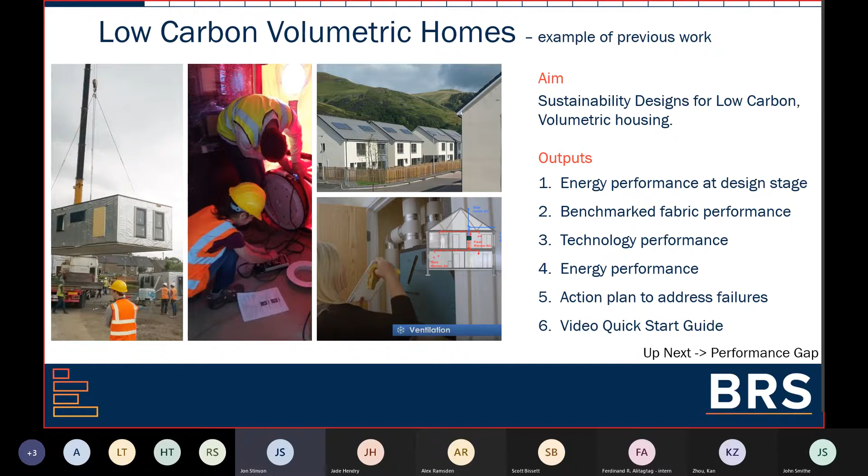So I doubt that anyone has faced, and I hope that no one has faced, the performance gap meltdown crisis that we did back then. And that's what really influenced this particular presentation, which brings me nicely to the performance gap, why we should fear it, and the sustainability parameters that we're referring to here.

So, it's just getting my clock over here so I can see the time.

This is the first time that I've presented on the performance gap, and I'm sure you've heard a bunch of other people harp on about it. And I won't be the last person to cover this, because we're not quite done yet in terms of knowledge exchange and educating various different parts of the sector.

And just because it's been talked about a lot doesn't necessarily mean that early career professionals know anything about it. And that's what we're here to do with Collab today.

So the performance gap terminology, it didn't start in the construction sector, and it's not unique to us in any way. It was coined in the 19th century to describe why the second generation of steam locomotive wasn't performing better than the Gen 1 train. They needed a good reason as to why all that investment in technology wasn't providing a betterment. So we got the performance gap.

Now, for us in the construction sector, it really boils down to three things. One, behavior. Two, the quality of our models and the simulation formulas. And three, the quality of our measured data in terms of what we get from our as-built sensors and loggers.

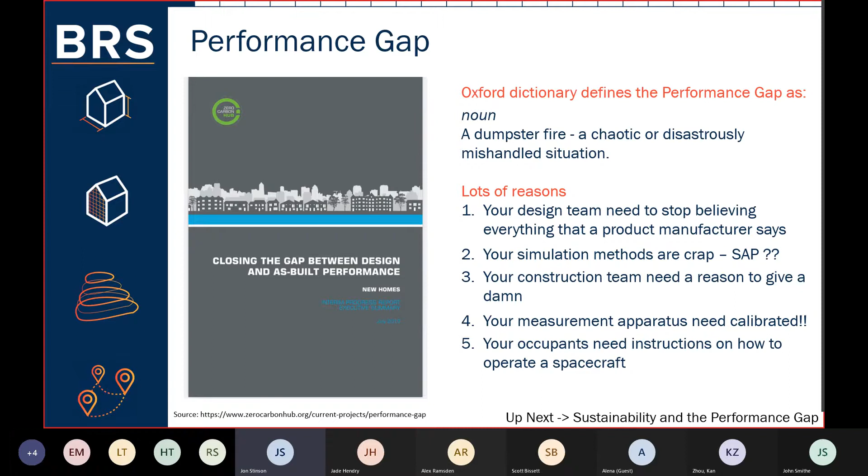So what makes this webinar different from the last one you've attended about the performance gap? Well, this is not about the why - why the performance gap is a problem and why sustainability is important, because we're well past that point. It's not about the how - how the performance gap is wrecking our sustainability progress, because we're also well past that point.

I've structured this presentation today to be about the what, as in, what does this look like on the ground? When you're in the trenches on the front line, when you're facing down the barrel of a very angry client, and you're wondering, what the hell am I going to do? That's what this particular presentation is about.

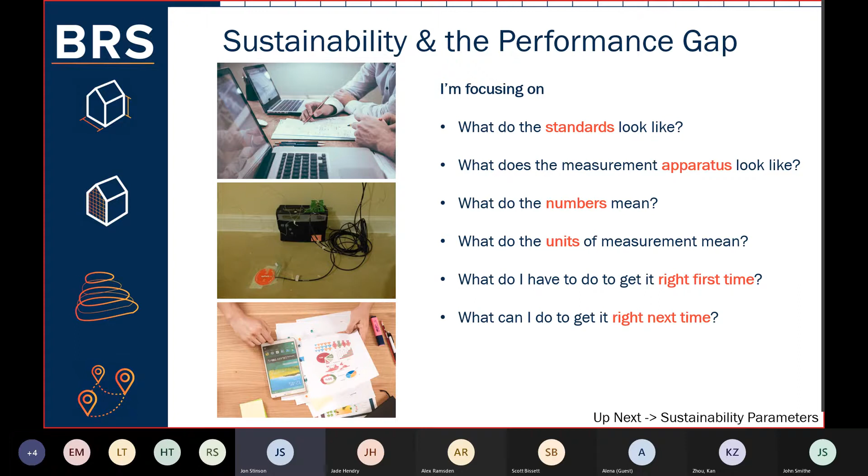So I want to focus on what the standards look like for as-built, or as-designed and as-built. What does the measurement apparatus look like when you're doing it at the as-built stage? What do all these numbers mean for as-built and as-designed? What do the units of measurement mean? And what do I have to do to get it right first time, and what do I have to do to get it right next time?

So let's get stuck into what the standards look like. First off is sustainability, quite a broad term, a very big word with hundreds of meanings and literally hundreds of interpretations. The word is frustratingly difficult to actually nail down into something quantifiable.

Conscientious citizens have been trying to define sustainability since the 60s, essentially to undo all the damage done by the rampaging Victorians during that era. Government stepped up in the late 90s. Companies and corporations joined the movement in the mid 2000s, or early stage of the 2000s rather, and now it applies to almost every aspect of everything that everyone does, now and forever.

So let's define our meaning of sustainability parameters for this webinar. It's not about the three pillars, which is economy, environmental, and society. My colleague Ruth could speak about this for hours, and she has an article on the LinkedIn page speaking a little bit about this. So it's not about that definition, those three pillars, because that's much too high level for the purpose of this webinar.

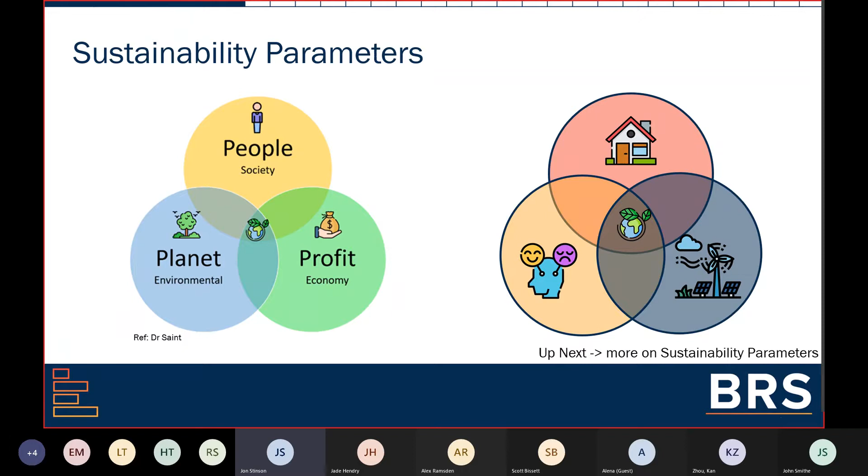I'm talking about this one here on the right hand side, which we call the three actionable parameters. These actionable parameters can be applied to water use, well-being, which encapsulates the term for acoustics or noise, and safety. It can apply to energy consumption, it can apply to carbon emissions, and it can apply to cost to run a building. So from this point forward, I'm referring solely to

energy in buildings. And to keep it simple, I'm going to speak about space heating energy only, because the full version of this is about 150 slides, and we don't have time for that today. But if we can come back sometime in the future, we might be able to do these other bits and pieces with Collab.

Now, the technology and the building parameters, those two circles there on the right-hand side, were the original actionable parameters defined between 2005 and 2007.

My research between 2007 and 2009, amongst others, introduced this third parameter, which is the occupants. Until that point, we were all happy in the notion that sustainability in the built environment meant optimizing the relationship between how much energy a building demands and how much the on-site renewable energy technology could supply, or in other words, reducing one and maximizing the other.

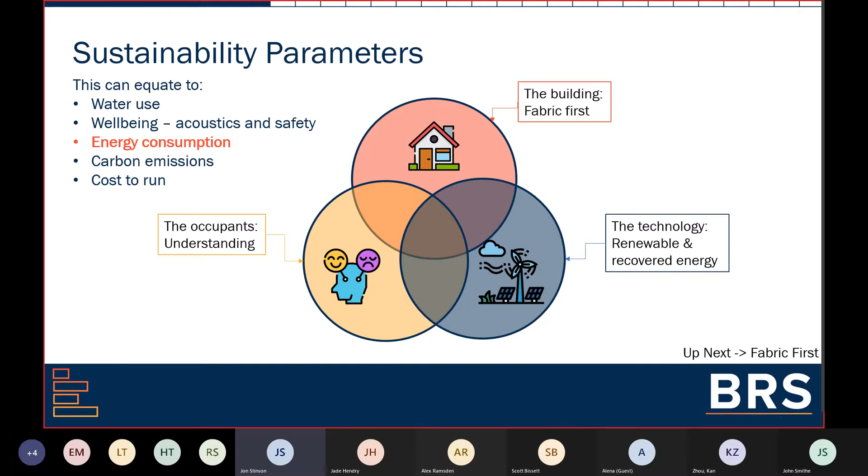Then we started to see our new shiny, low carbon, low energy buildings behaving very badly with huge energy bills. This was not so easy to resolve because now humans are involved, and nobody went to architecture, surveying, engineering, or construction school to learn about why humans do what humans do. So psychologists got involved, and that got very messy for those of us not from a psychology background. But we're not going to worry about that today.

We're going to focus on the materials side. So if we look a little bit deeper into these three actionable parameters, we have materials, which for the purpose of this webinar is focusing on thermal transmittance, thermal bridging, and condensation. It also includes the embodied energy, which we're not going to cover today.

Technologies focus on space heating generation, which is really about the fuel type and the coefficient of performance, ventilation strategies, and also heat recovery systems. And human expectations when it comes to space heating is energy bills, natural light, air quality, noise, safety, and what you can do to the building after it's been constructed.

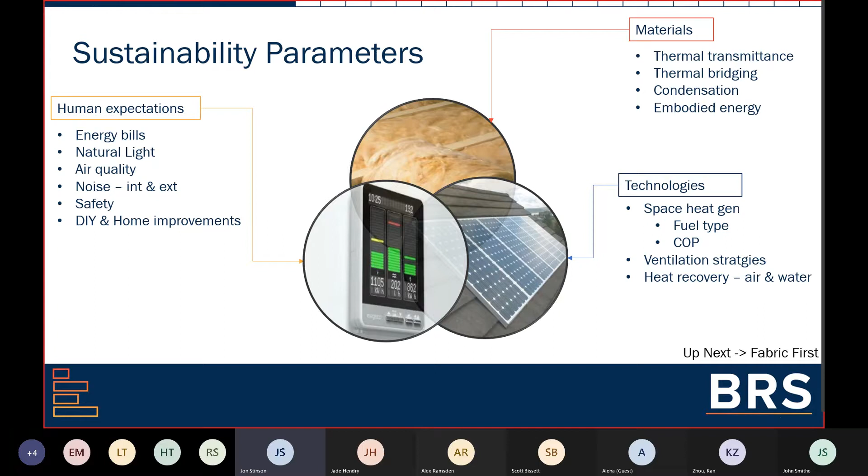Now, if we look at that Venn diagram just a little bit closer, we realize that the new parameter of human expectation not only brings a lot of challenges by itself, but it also introduces two more gray areas. Between human expectations and materials is perceived comfort, which has a very broad spectrum. Between human expectations and technology is usability and controls, specifically those of the user interfaces we have to interact with to achieve our perceived level of thermal comfort.

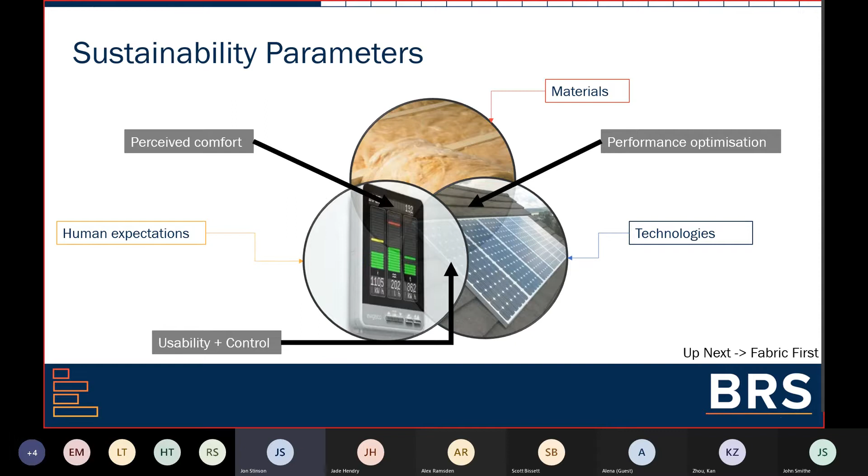We have the age-old performance optimization between technologies and materials, which is relatively easy to achieve. Now, as we got our heads around the right behavior modification and change stimulus, we realized, hold on a minute - why is a low energy house made with steel and phenolic foam declared as being just as sustainable as a house made from timber and sheep's wool? Why is that being allowed? Then the economists came in with their carbon accounting, embodied energy, and life cycle assessments, which expanded the scope of sustainability and the parameters past the operational phase of a building's life. That's a whole new field of science, one which my business partner Ruth knows all about, but one which I'm going to avoid talking about today. For this webinar, I only want to cover one of these parameters in isolation, and that is fabric first, the materials.

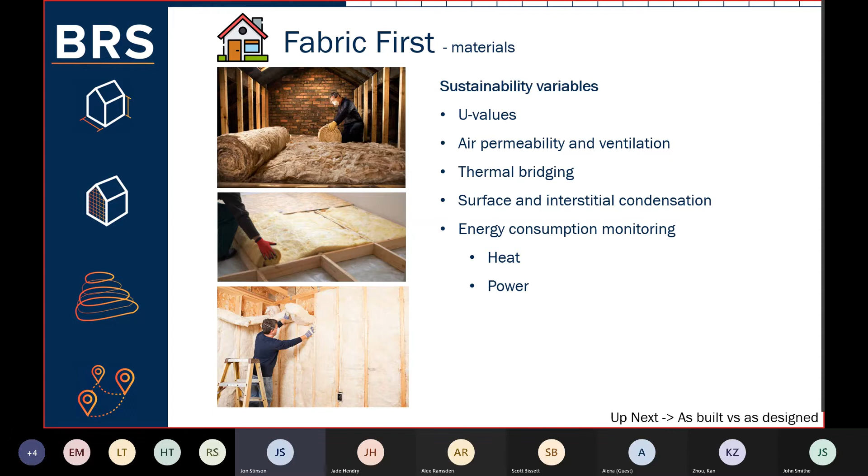By fabric first, I mean specifically the performance indicators for U values, air permeability, thermal bridging, condensation, and energy consumption. I want to look at these five variables through the lens of standards, targets, values, units of measurement, and then the apparatus and equipment we can use to actually measure them when the building is complete. Which brings us neatly into the design standards.

We're all familiar with this little adage, and it's flexible enough to be applied here. I want to keep this in mind as we go through these next slides, because this is what typically happens. Someone will say, oh yes, air tightness, I know all about air tightness. I've read something about that in a trade magazine on a CPD pull-out one afternoon.

Well, first off, it's pronounced air permeability, not air tightness. Secondly, variables like air permeability are set way at the very start of a design stage, and then can very quickly get lost in the myriad of other important design and building requirements. No one really pays much attention to it until your building performance contractor comes back with a report saying your air permeability value is much worse than you said it was going to be. What are you going to do about it? Then there's lots of running around and getting a bit panicked.

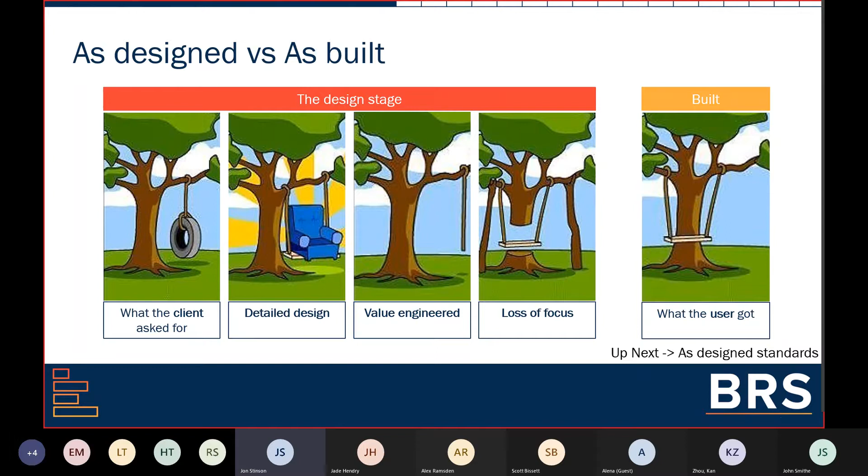A lot of what I'm talking about in terms of U values and air permeability has become so ubiquitous to us in the built environment that it's overlooked an awful lot and just perceived as, well, it'll be all right on the night, we'll get it sorted out when the time comes. People can lose focus on those things very quickly.

So when I say sustainability within the context of this webinar, I'm referring solely to fabric efficiency of the dwelling, and I'm going to go through each of these five one at a time. Some of you will be familiar with where those variables live in the devolved building standards or building regulations or building control documents, whatever you want to call them, from whatever region you're from. But for the sake of completeness, let's give each of these variables their proper origin and their legal position.

Each of them exists in at least one BSEN ISO. I want to point out that all of these are part of legal requirements for building standards or building control, whatever you refer to them as, and have been and need to be verified by the building standards or building control officer before the thing is actually built. So what you read inside Part L or Section 6 or Part F or wherever else, they've all begun life in one of these BSEN ISOs.

Most of them have been renewed in the past 3 or 4 years, and they will continue to be renewed and will continue to inform BRE, or BRE will continue to inform them. That will continue to inform SAP. So as we move from SAP 2012 to SAP 10, there'll be a jump from the BSEN ISO 13790 to the BSEN ISO 52016, which has a brand new set of formulas and equations there to define thermal bridging. So that's where they kind of come from.

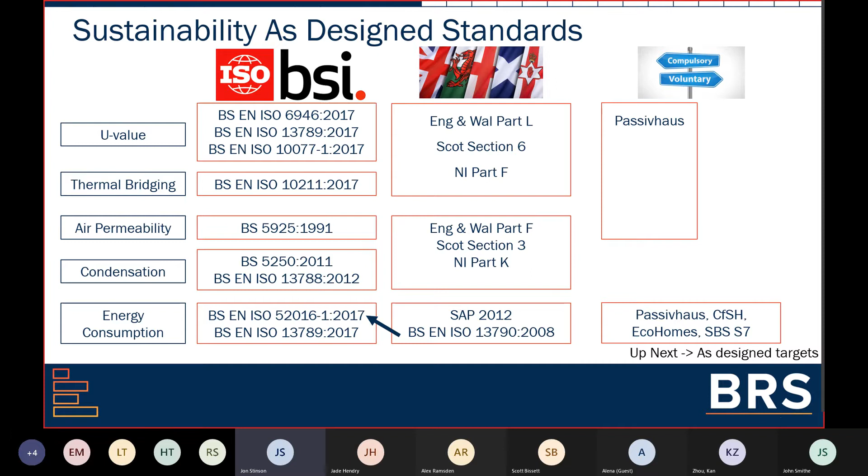Now we've got some non-compulsory, voluntary standards here, which are Passive House, Code for Sustainable Homes, Eco Homes, and Scottish Building Standards Section 7, appropriately named Sustainability. I'm going to make reference to Passive House and SBS 7 once or twice moving forward, and I want to make clear that those are voluntary standards. I'm not going to go into the Code or Eco Homes because they're kind of either dead or have died off in recent memory.

First off, U value or thermal transmittance also includes a factor for repeated thermal bridging, which is one of the two types of thermal bridging I'll be speaking about today. U value is a measure of how much heat energy in watts passes through every meter squared of element when the temperature on either side of that element differs by 1 degree Kelvin, giving us watts per meter squared Kelvin. This value has the largest effect on the thermal comfort within the dwelling, or any building really.

If you have, which happened recently and got a little bit of unfortunate press coverage in the construction news, a house builder that misses out a big chunk of wall insulation for whatever reason, it doesn't take too long before the occupant works out that this room is very cold. Why am I paying this amount of money for a new build? It's one of the issues that are very easy for an occupant to detect in terms of it not being there or not working well enough.

We use the BRE U value calculator and the BuildDesk U software to do our at-design-stage calculations.

For existing buildings, the U value can be as high as 5.2 for windows, 2.4 for a roof, and 1.8 for a wall. These are historic values, for pre-1919 buildings roughly. For new build, the targets in the various building standards and regulations around the country go between 0.21 to 0.3 for walls, and very similar for roof and floors, and 1.6 for openings. The Passive House standard is somewhere below 0.8 for openings.

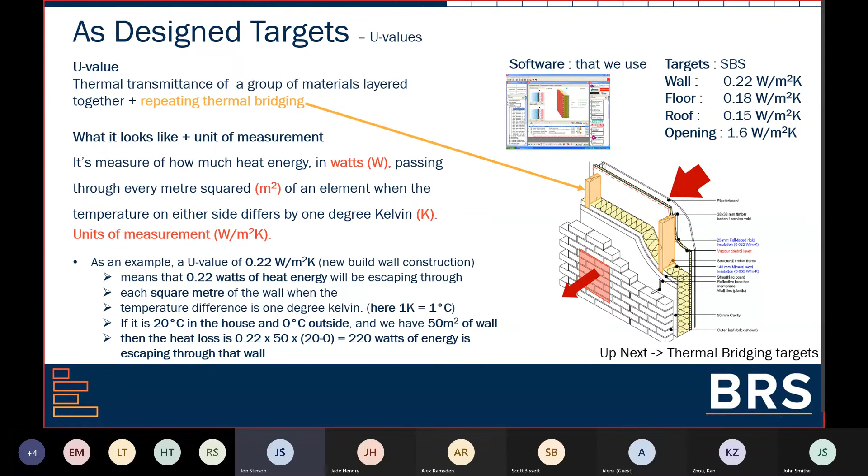Thermal bridging, or the psi value — this has the largest effect on the health of the building, and therefore the health of the occupant, which we'll cover a little bit later under condensation. We use Flixo or the LBNL Therm software — Therm being free, and Flixo having one of the better, more usable interfaces, but there's a cost to that as well.

Those days are gone, and we can now choose BRE's default psi values for junctions, which are, for example, a junction between a wall and a floor is 0.32 watts per meter Kelvin, or for a windowsill, 0.08 watts per meter Kelvin.

Or you can use the accredited values, which can be almost half of those default values, or you can use Flixo or Therm and design your own values, which can again be better than those values. You can provide evidence to building standards or building control, however you want to call them, and that will be pretty much accepted. We'll cover an issue in designing your own thermal bridging details a little bit later towards the end.

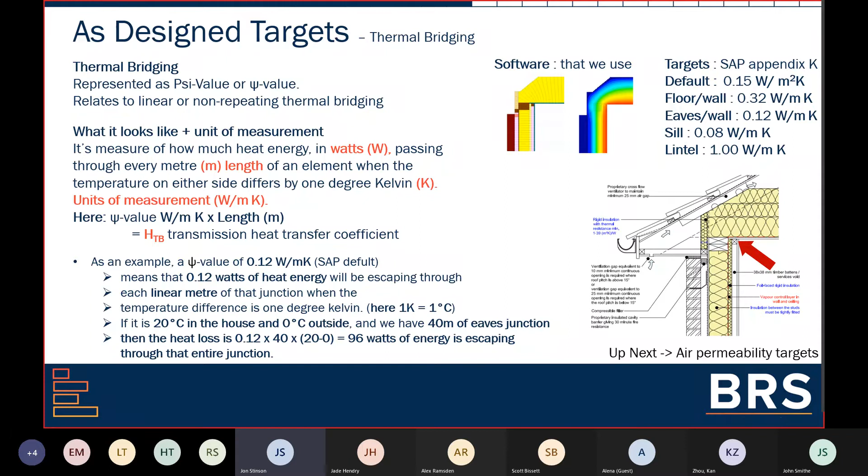Ultimately, as U values have become really low and almost impossible to get much lower, the effect of heat loss through junctions has become the new obsession of the built environment and the building performance sector, which has seen a large increase in the number of thermal bridging software available, and also quite a large increase in the cost of that software — which I'm sure you'll notice when you go to buy it and then pick your jaw up off the floor.

Next up is air permeability, and the same is true here with super low U values. The effect of heat escaping as ventilation heat loss is very significant at this stage.

Air tightness is a product of achieving low air permeability, or low air changes per hour. That's how BS EN ISO define it.

So what's the difference between air changes per hour and air permeability? Air changes per hour is measured across the building's volume, and air permeability is measured per the envelope area across the building envelope. So what does this look like?

Unless you're working to Passivhaus standards or other non-British standards, you're going to have to use the term air permeability. The unit of measurement for that is the airflow in meters cubed moving from inside to outside of a dwelling every hour, through every meter squared of the building's insulated envelope, and importantly, at 50 pascals.

So let me give you a bit of context. On a relatively breezy day, your building is pressurized between 5 and 10 pascals. So when you're doing your air permeability testing, you have to stress test the envelope at 50 pascals.

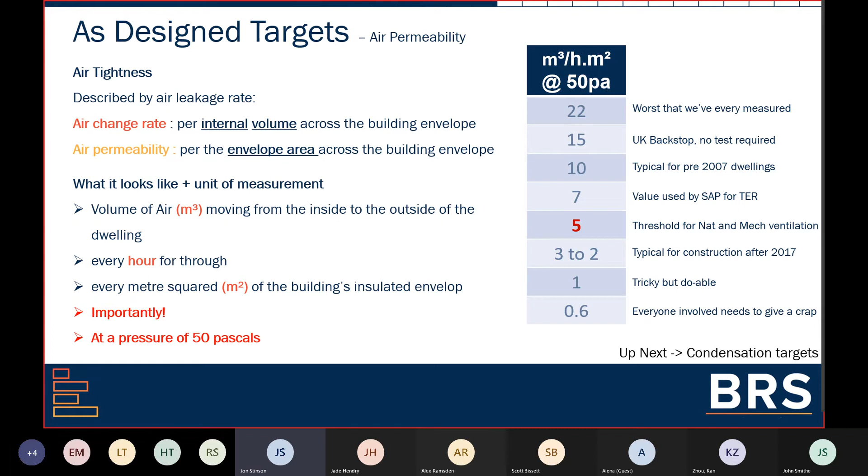Next up, condensation, and this will take 2 forms: surface condensation and interstitial condensation. Not an easy word for me to pronounce, interstitial, but essentially it means the condensation that forms at the interface between the layers of an element, like a wall. So between your insulation layer and, say, your OSB on the outside, which is there for racking strength.

Now, this has the largest effect. This also has a large effect on the health of the building, which affects indoor air quality and therefore the health of the occupant.

We have a few metrics of performance here. We have ambient relative humidity, which must be kept below 70%. Surface temperature, which is calculated as surface resistance temperature factor, or FRSI, and the dew point or temperature pressure differential.

Now, with prolonged instances of RH over 70% and/or areas of an element where a cold spot exists, also known as a thermal bridge, then there is a high likelihood that mold will germinate, grow, reproduce, and as such spores will begin to enter the airstream within the building, leading to respiratory issues for occupants and then ultimately damaging the more vulnerable building materials like plasterboard, wallpaper, timber battens, lath and plaster for older buildings and things like that.

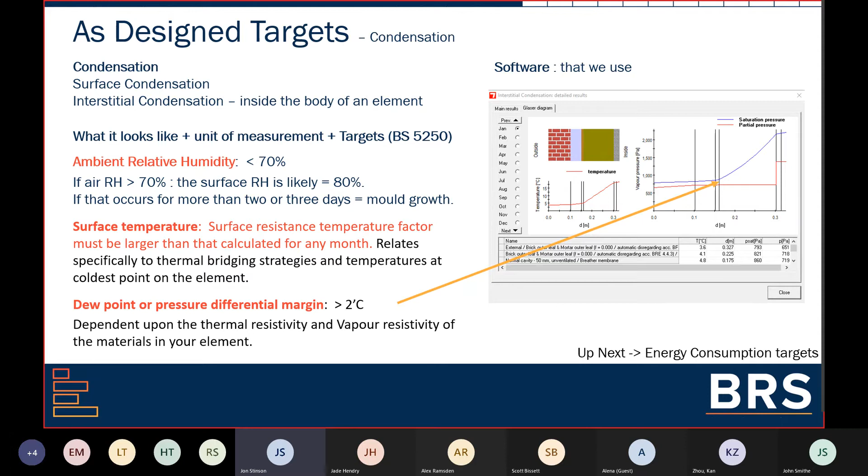So we use BuildDesk U software for our condensation risk analysis. Like most other software mentioned so far, it is a steady state and mostly numerical input. WUFI, which some of you may be familiar with, is the antidote to those steady state type of numerical software. However, there are known issues with WUFI in terms of the weather file for regions of the UK and also material library databases for the common materials we use in the UK. So I'm not going to show what WUFI looks like at the moment.

So next and finally within this is the energy consumption. Essentially this is the combination of every other variable we have just spoken about. Now, you won't find actual kilowatt hours per year targets in most standards or regulations. Most of them leave that to the somewhat useful target emission rate set by the BRE SAP methodology, the Standard Assessment Procedure methodology.

Now, I take issue with using carbon emissions as a key performance indicator. After all, energy as joules or kilocalories or watts is an absolute term. It makes up everything living in the universe and describes scientifically the flow of energy transfer, whereas carbon values can be changed almost instantly whenever the national grid turns on a backup coal or oil-powered power station during a particularly interesting episode of Coronation Street or something like that. So carbon can change instantly where energy is absolute.

So TER, not really on board with that idea, but it is what it is. But Scottish Building Standards Section 7 and Passive House aren't afraid to set a kilowatt hour target.

So the Scottish Building Standards Section 7 have that somewhere between 20 and 40 kilowatt hours per meter squared per year. And Passive House has that at 15 kilowatt hours per meter squared per year, or their 10 watt peak per meter squared for whatever energy system you're using there.

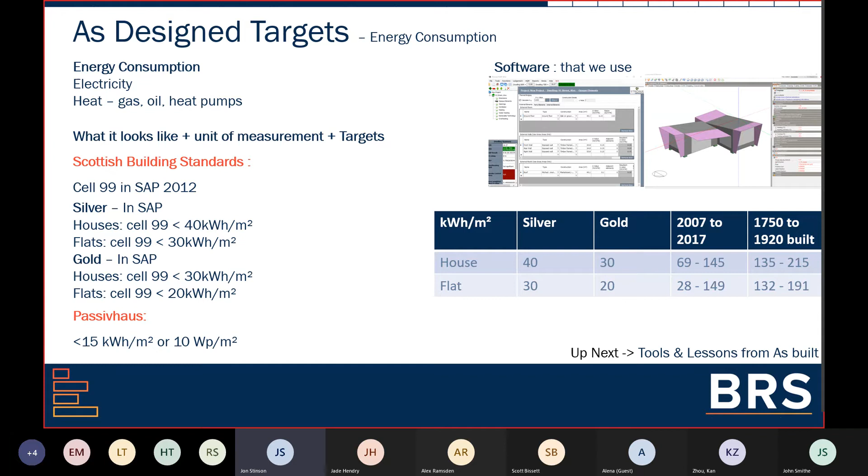Now we use, like everyone else, SAP software. Stroma provides ours. But we also use Energy Plus with the Design Builder graphical user interface as our dynamic energy modeling software for times when we need significantly more control over the weather files and over the occupancy schedules.

Right, so almost finished, got a couple more slides to go, and then we'll hopefully have a bit of time for Q&A if there is any.

So that's us covered the as-designed standards, the targets, the 5 major variables, what they look like, and what they're all about. Now I want to move on to the as-built tools that we use, and as-built tools and lessons for the same 5 variables we just spoke about.

So just like the as-design standards, good old reliable BSI and ISO have a set of standards for measuring these variables after the building is constructed. Now, you're going to say to me, John, what are those question marks for? Well, that brings me to another point I want to make.

13788 is actually the standard for calculating condensation in buildings. It's not actually used for measuring condensation in buildings. However, we have reverse engineered that standard and created our own methodology from those principles for how we measure condensation in buildings and within elements of what makes up a building.

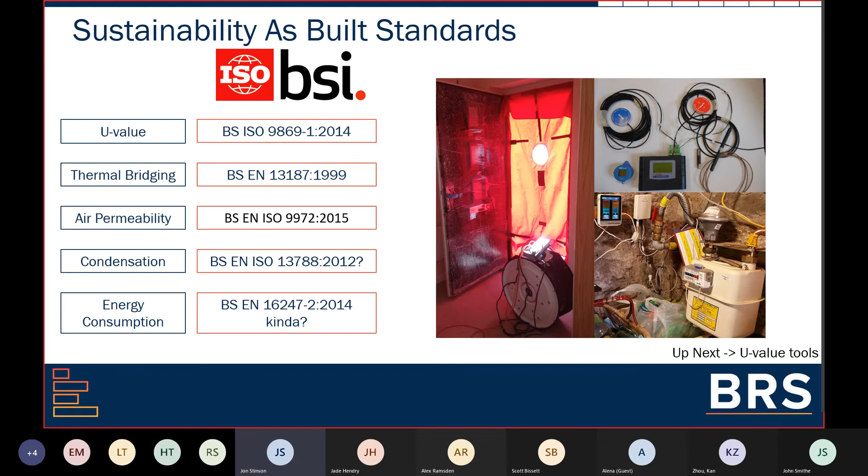So let's have a little look and see what those are. These slides are quite quick, I know I'm running out of time, so I'm going to follow the same format for the next 5 slides for U-value, thermal bridging, air permeability, etc. I want to give you a bit of an image roll along the bottom as to what they look like.

And we have them used and we're installing them, and a little bit of what the output looks like from our reports, etc. But I want to just very quickly cover the apparatus, the methods, and the outputs.

So the U-value measurement has quite a long monitoring period, but it's by no means the longest. But because it has a greater than 14-day monitoring period, that's kind of one of the main reasons why it hasn't made its way officially into any building standards.

And also, it can be a little bit destructive when you're trying to pull your heat flux mat off the wall and you've got either wallpaper or paint there. It can be a tad destructive. So that also has kind of taken away its charm a little bit. But the output from that is in microvolts per watt per meter squared.

Then we have algorithms that turn that into watts per meter squared. And then we declare that as an absolute value after the data becomes asymptotic, which means it becomes steady state.

Now, no matter who gives you a measurement from U-value monitoring, there is a plus or minus 10% error on this type of measurement. So you can get a number, watts per meter squared Kelvin, and compare that directly to what your U-value software told you it was going to be, but be aware that there will be an error of at least 10% on your measurement. And whoever's giving you that number should report the size of the error.

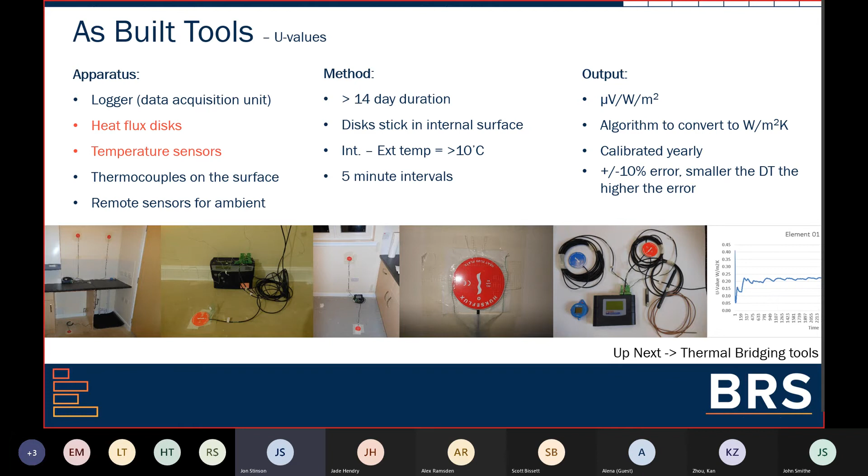IR, everyone's favorite piece of technology for measuring buildings, and erroneously described as easy to use and often very poorly interpreted. But it makes for really cool images, and these are what we call thermograms.

Now, they're quick and cheerful, and they can be used to compare to your thermal bridging results from your software, specifically the temperature points along the internal surface of your computer model. But only if your software, your camera, and your IR software support radiometric data. Radiometric data will add about £1,000 onto the price of your camera, and you tend to not get radiometric data at the £200–300 camera size.

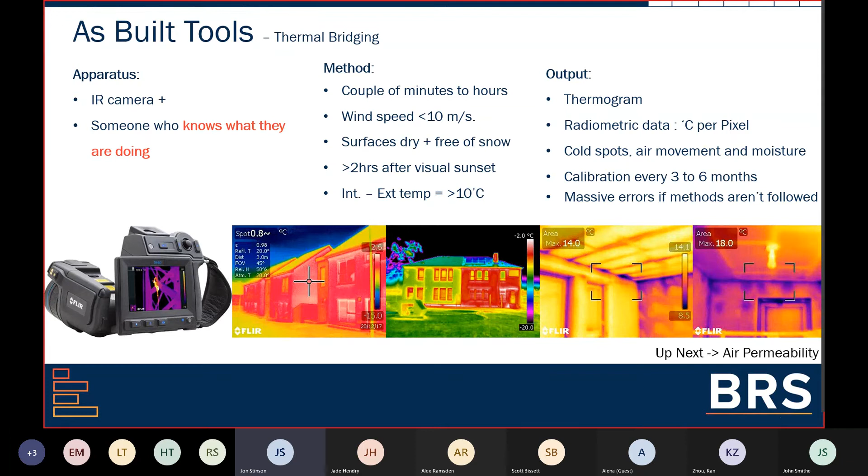Radiometric data is important because every single pixel that you see on your thermogram has a temperature point, and that temperature point can then be used to compare to the temperature point on your thermal bridging software, which gives you the comparable number that you need. But for the most part, this is mostly for qualitative findings and for detecting cold spots, air movements, moisture buildup, and things like that.

Next is air permeability, often incorrectly referred to as air tightness testing, but that's how our building standards call it. It's a very common test within most housing developments. If you drive past a certain housing development at a certain point, you're most likely going to see one of these red doors popped up with a fan in it somewhere.

Now, it's a balance between the speed of an IR survey, which can be minutes to hours, and the high quality quantifiable results of a U-value measurement, which can take up to 14 days to get that number. Air permeability is favoured amongst most building standards or building regulation committees because it can be done quickly and it gives you numbers that you can rely on.

Now, the thing you need to be aware of, if you're ever looking at an air tightness result, is that there are two major factors, or numbers, reported alongside the result: the correlation coefficient and the exponent. These indicate a margin of error.

Now, these air tightness tests are really only precise up to 1 decimal place, and they can have up to 15% error. So if your air tightness person comes along and says, listen, we've measured your building and it comes in at 3.247—well, no, it really came in at 3.2, because it's only really reliable up to 1 decimal place, and there's a margin of error in there as well.

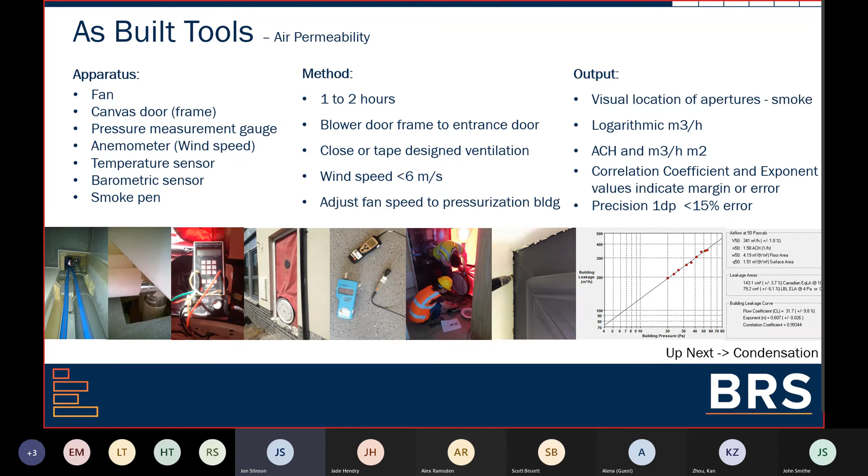And what you also want to see on your report is the correlation coefficient, which has to be higher than 0.98, and your exponent, which has to be between 0.5 and 1, because you can get a result from an air permeability test where you hit your target, but your exponent is way off and your coefficient is way off, and it essentially means that number means nothing. So if you're ever looking at a report on air tightness or air permeability, please look for those two numbers.

Almost near the end, last couple of slides here, condensation. This really needs a year's worth of monitoring and measurements, but 3 months would be a minimum if you were trying to push something through quickly. And if it was a 3-month monitoring period, then you're looking at doing that over the heating season, called the winter period, essentially the coldest months in the UK: December, January, and February. So to expedite those results in a short monitoring time frame, you're looking for times of the year when external relative humidity is high and temperature is low. And again, that's December to February.

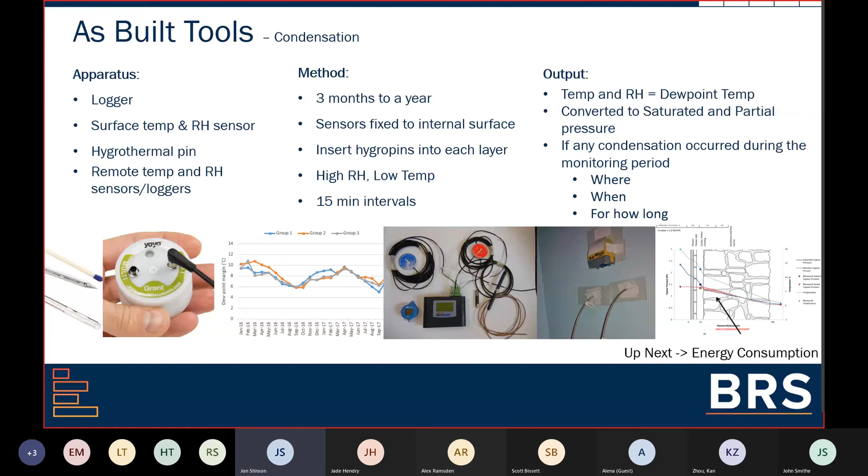So ultimately, you want temperature and RH data from your measurements that can be compared to the outputs of your software. Now, if we're looking at the outputs from BuildDesk U, for example, according to BS EN ISO 13788, the output is monthly. So if you can get measured data monthly, then you can compare that to what you calculated monthly, and measure the difference and what's going on.

Finally, within the variables is energy consumption. Just like the BuildDesk U software for condensation, the output for SAP in terms of energy consumption is monthly. That's the highest resolution you're going to get from SAP for that. So you want to measure at least monthly, but a year is really the minimum you're looking to get from that. So you'd be measuring volts and amps, turning it into kilowatts, and averaging that over an hour to get kilowatt hours for electricity. Then your pulses connected to your gas meter are converted to meters cubed, then to kilowatt hours, giving you a month and a per year figure.

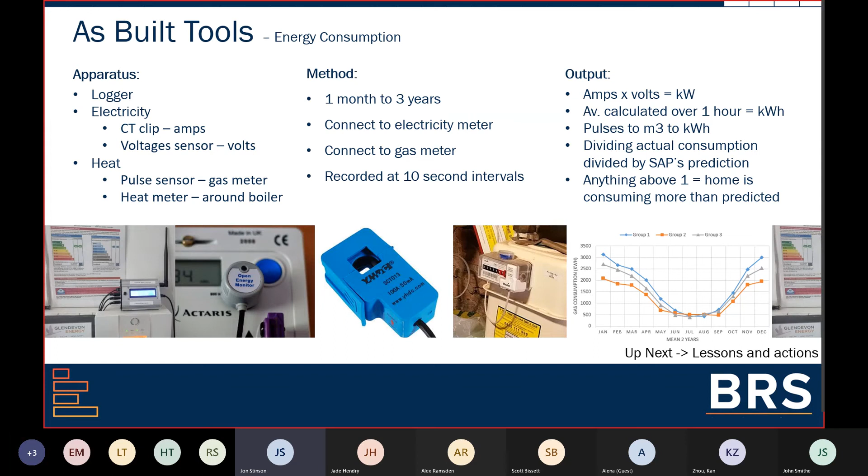Now you can get little cheap and cheerful things off the shelf for like £5 or £10 to measure electricity, but they just measure amps, they don't also measure volts. If you just get one with a little blue current transducer, that'll just measure amps, not volts, and that leaves you quite exposed to getting a margin of error of up to 25% if you're just measuring amps. You really want a piece of hardware that measures amps and volts.

Now, final two slides. I know I'm a little over time, but I'm going to move through these quickly. So we're going to wrap this up, and no better way to do that than to go over some of the lessons we've learned from our experience, and the actions on how to close that performance gap and help on your next project. So let's go through these 5 variables very quickly.

So for U-value, learning from as-built and going back into the next generation of building you're working on for as-designed, you're looking for either thicker insulation—so if it's a timber frame, going from, say, 140 millimeters to 220 millimeters—or you could invest in insulation with better lambda values.

Thermal bridging: you're looking at adding insulation between the structural element, like your timber junctions around your roof eaves, and either the internal or external environment. But what's important, as I alluded to earlier, is to make sure that wherever you're putting that additional layer of insulation around a structural element, someone can actually get their hand in there to install that piece of insulation, because if they can't do it, your thermal imaging camera survey will give you a bit of a hard time.

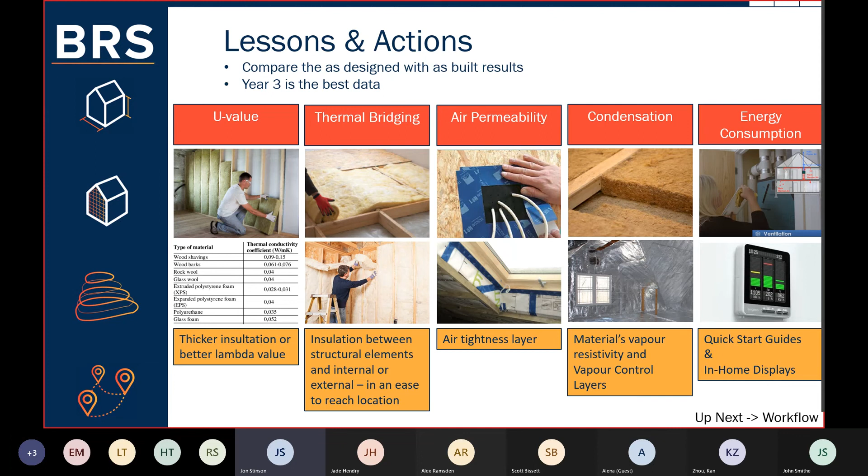So finally, how to implement all of that into your workflow. We have structured our research themes and our whole company around closing this performance gap for enhancing and safeguarding sustainability.

And we find that the first and most challenging gap to close is the knowledge gap. Once you close the knowledge gap, then you will inherently close the performance gap. So it's about monitoring, testing, capturing the data.

So the things you want to be thinking about is questioning your manufacturing data, because most data you get from most manufacturers will come from laboratory tests, not from in situ as-used tests. So those numbers inherently are always going to be slightly different. So trust in case study examples.

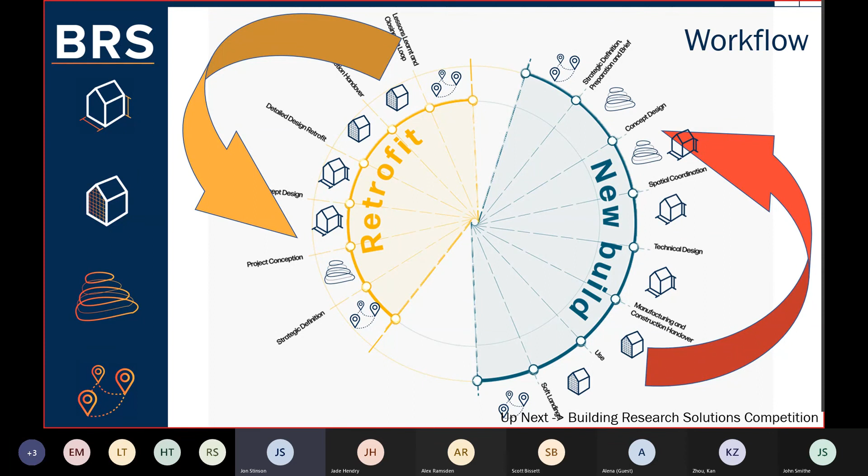Get your own hardware or become very friendly with a building performance evaluation company, then get your own data. And importantly, if you work with a building performance company, or with your own hardware and your own data, build up your own data sets, build up your own databases, and replace all those values that you thought you had from the manufacturer with actual values that you've got from case studies or from doing your own testing, wherever that may be.

So we did start a little bit late, so I hope I'm not too far over time. But that is all that I have time for today. And there's lots more beneath that and lots more around that, but that's possibly for a different webinar session.

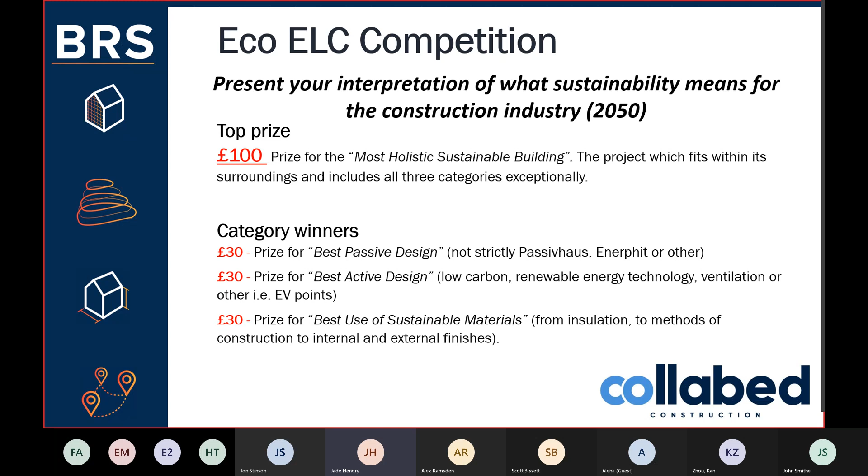So Alex, sorry for breaking your time limit there, but we may have some questions. I'm happy for you to... Yeah, well, I'll stop the recording now, and yeah, thank you very much to John and Jade.